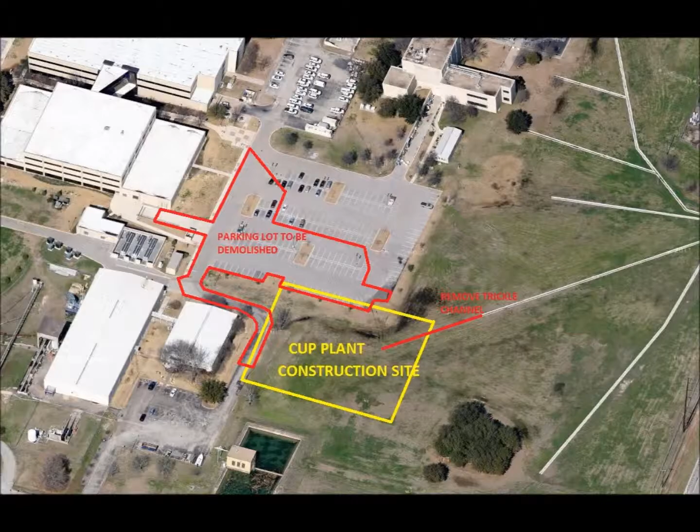Now for the specifics of the central utility plant expansion. The central utility plant will house the chilled water plant that is to be constructed in conjunction with the adjoining Research Office Complex, or ROC, which will house the fifth fastest supercomputer in the world. The purpose of the expanded chilled water capacity is to allow for adequate cooling of these high-performance computers that are to be housed in the ROC.

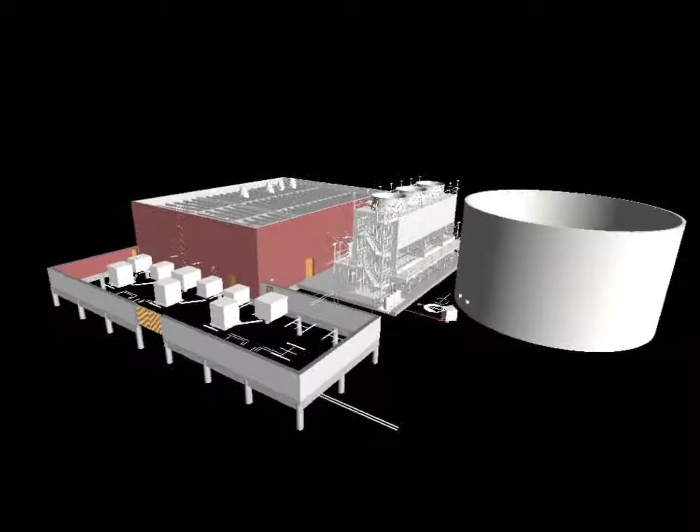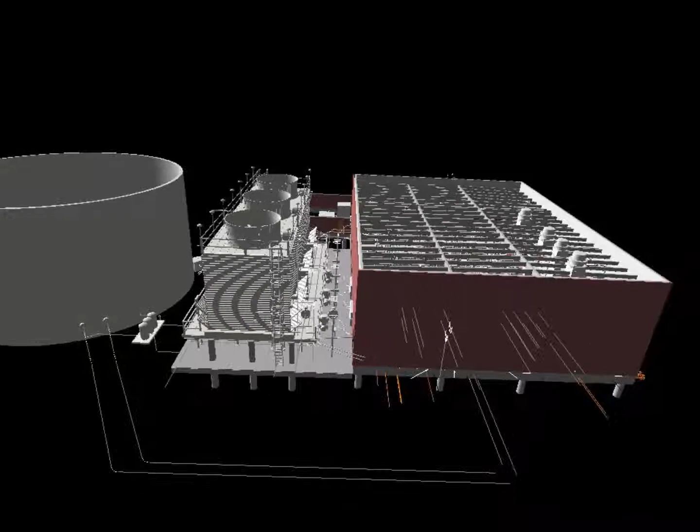The computer will require as much as 2,500 tons of cooling. The role of the $56 million central utility plant is to provide this cooling. The project includes a 1.2 million gallon storage tank. This tank will provide the cooling to the facility to increase efficiency, thereby lowering energy costs by allowing mechanical equipment to run at night when energy is cheaper than during peak hours. The project delivery method was construction manager at risk.

Substructural schedule. Now let's take a look at the construction sequence of the project, beginning with the substructure. The first step in the construction process is to drill and place the 24-inch piers. This will be done starting with the piers that are located on column line 21, followed by column line 22 piers, and so on. The piers will be filled with concrete and steel the day they are placed in order to avoid having open holes on site for safety reasons.

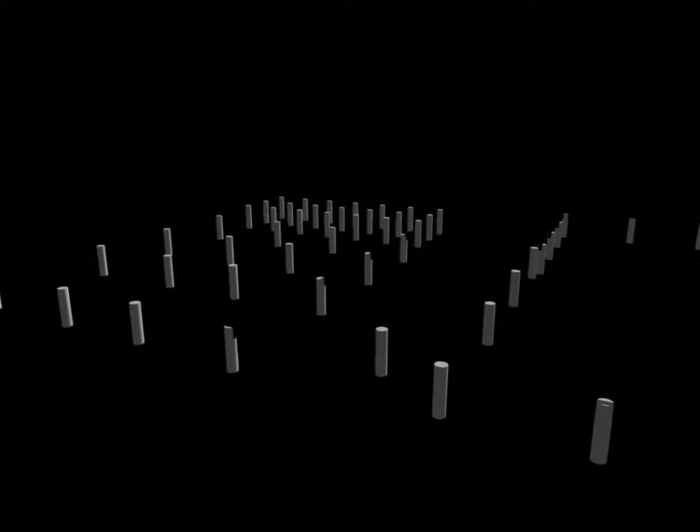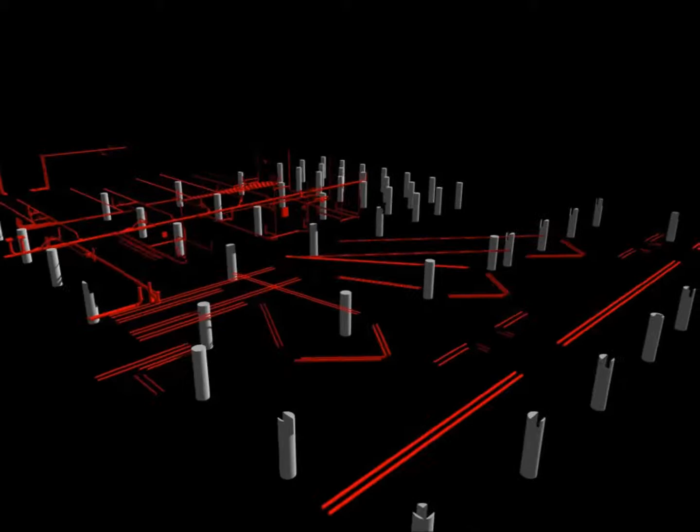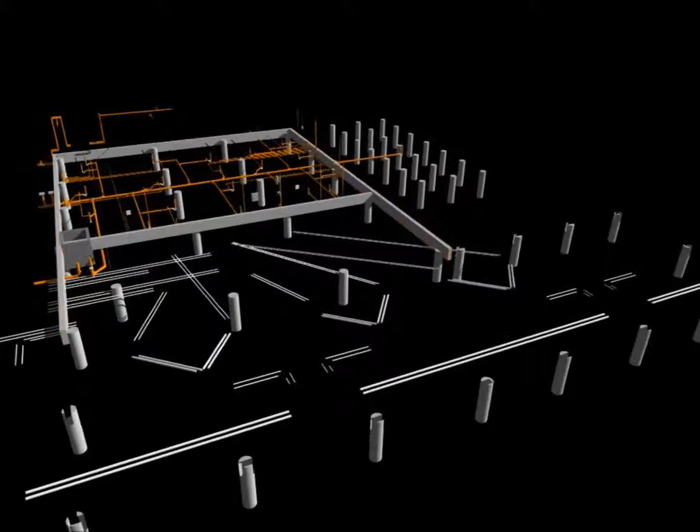The depth of the piers will vary depending on when the soil reaches a specific bearing capacity. The piers for the transformer yard and chiller tower will be placed following the main structure's piers. Next, the underground MEP will be placed. Electrical and mechanical trades will have to work in close confines during this portion of the project. Next, interior grade beams can be placed, followed by exterior grade beams. After grade beams for the main structure are complete, the transformer yard beams can be placed.

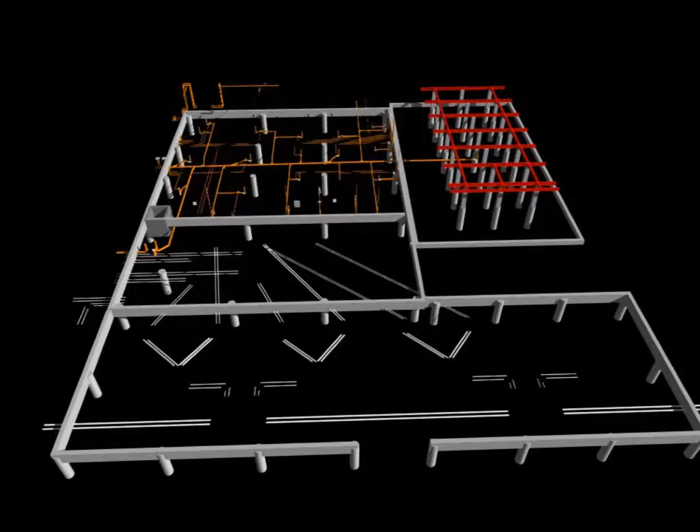Next, columns for the chiller towers will be formed and placed prior to the grade beams for the chiller tower being placed to allow access. The grade beams for the chiller tower can now be placed, as well as the structural steel for the chiller tower. Now the 6-inch slab on grade can be placed for the main structure. This will be done in one pour. Following this, the chiller tower slab will be placed. The substructural portion of the project is now complete.

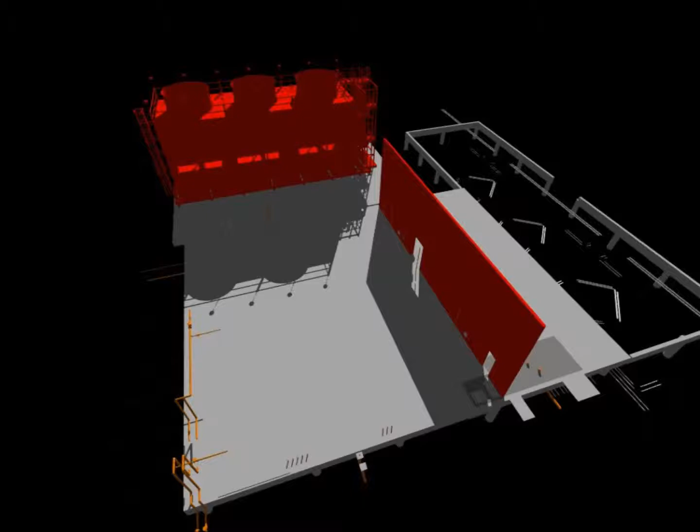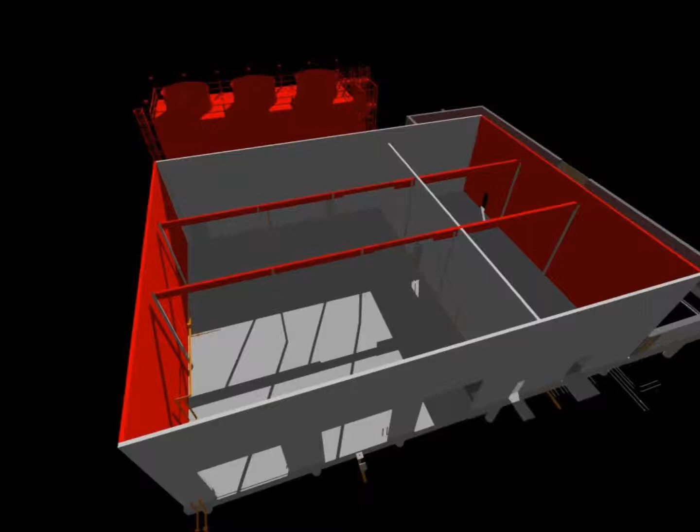Superstructure schedule. The first step of the superstructure's construction to begin is building the CMU walls. The first portion of the walls to be constructed will be the interior wall that will separate the electrical room from the mechanical room. This will be followed by building the northern and southern walls. These two are critical because the steel joists will grout into these walls. The east and west walls, now under construction, are not critical to steel erection. During the construction of the CMU walls, the chiller tower has begun. The construction of this chiller tower will continue until the end of the schedule.

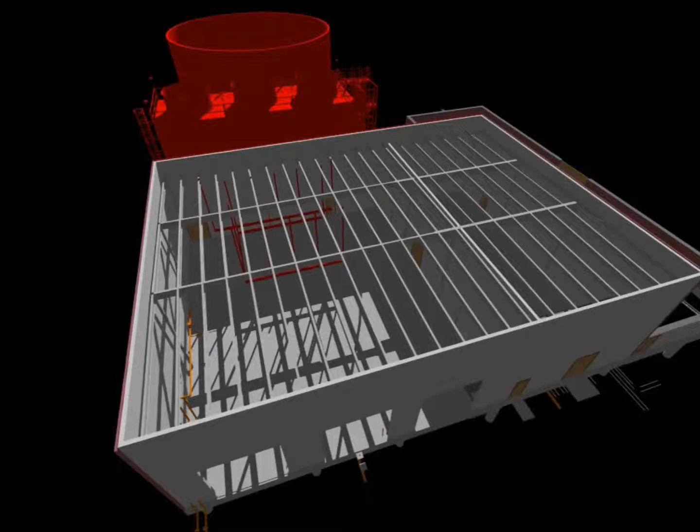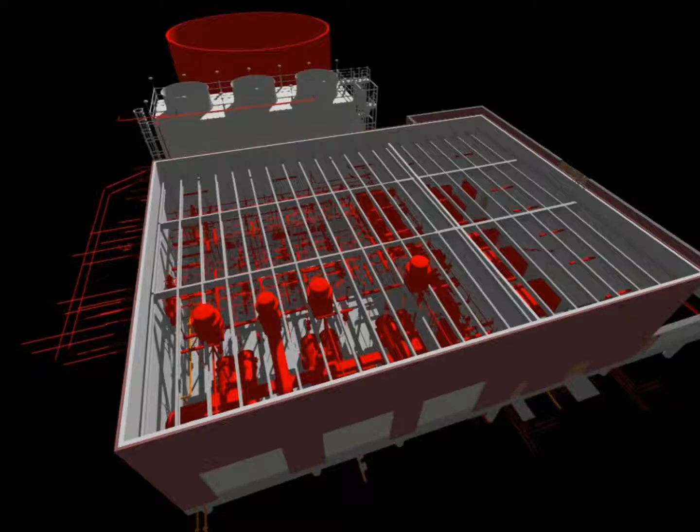Now the 6-inch steel columns will begin to be erected. These columns will support the stringers and the joists, which will support the roof deck and membrane. Following the completion of the columns, the 2 rows of stringers can be erected. Following the erection of the stringers, the steel joists can be constructed. The roof deck and membrane can now be installed. The brick veneer surrounding the CMU can be installed around the outside of the main structure. Following the completion of the roof, which is hidden from view, the mechanical, plumbing, and electrical trades can begin to complete work inside of the equipment and electrical rooms.

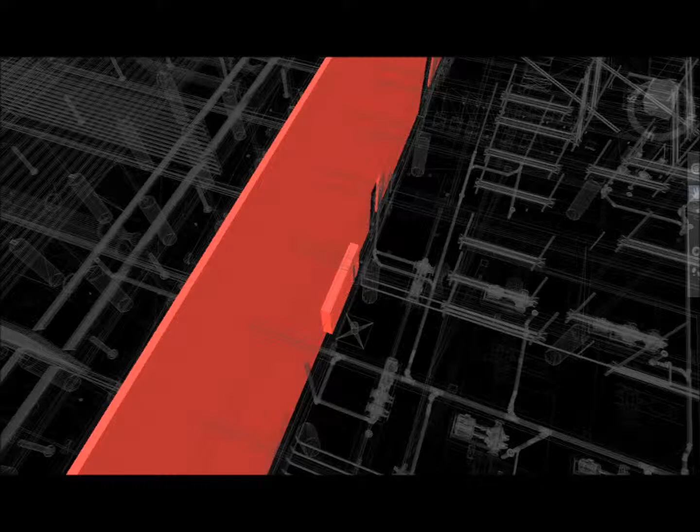Mechanical room. Now let's take a look inside the equipment room. The pumps for the chiller tower are visible, as well as the overhanging pipe from mechanical systems. Clash detection. Finally, the implementation of building information modeling on this project will allow detailed clash detection between different scopes of work. These are examples of issues that have been detected prior to construction beginning. Correcting these issues before they arise in the field will allow a shorter schedule and a lower cost to the owner.